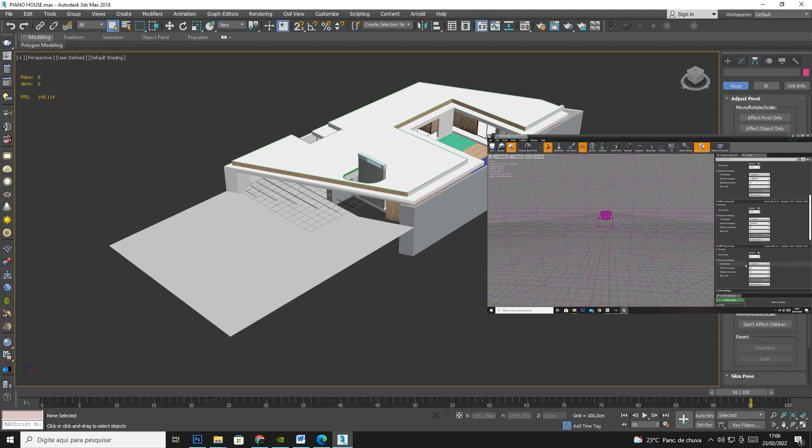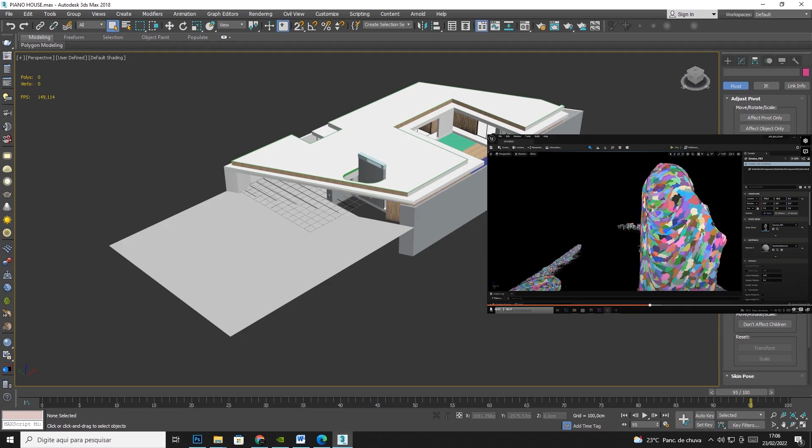We also have LOD on Unreal Engine 5. But in addition, when we get to the optimization module, there is also Nanite, a new technology that came specifically with the launch of Unreal Engine 5. This technology subdivides your object's geometry into clusters. Unlike LOD, this one allows you to use infinite polygon counts for your object. Obviously, there are some limitations, but we will talk about that in the Unreal Engine 5 class, okay? Don't worry about it, we'll talk about it.

But here in Max, it is already important that we think about how the objects will be optimized in Unreal Engine 5, okay? How do I want to present my project? Like a video, or browsing in real time? If I want to present it as a video, I can render this project. Rendering inside Unreal is much faster than another offline renderer. When rendering a video, I can abuse the polygon count a little more because I won't be browsing in real time.

Now, if the project is to browse in real time, it's necessary to optimize the geometries well and use the Nanite feature and also the LOD feature that is available in Unreal Engine 4 and Unreal Engine 5. What do I have to keep in mind when I'm talking about games and Unreal? Optimization and organization. Let's see, for example, how many millions of polygons our whole project has in the scene. How can I do it?

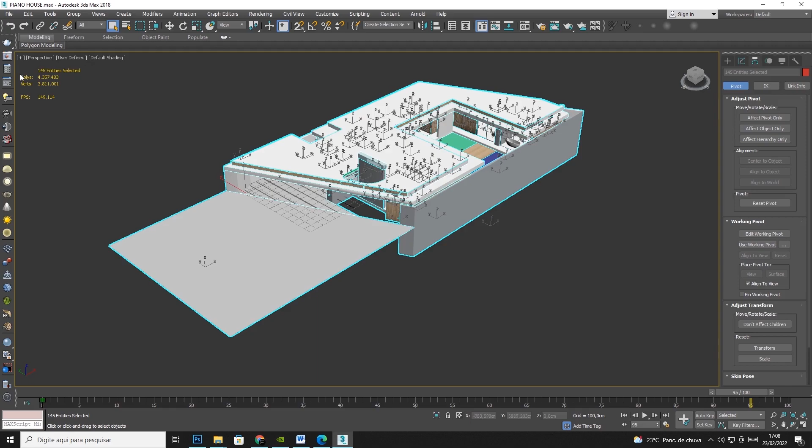In my case, you just select everything because I already enabled the stats in the scene. If your Max doesn't have the stats enabled, you can enable them by clicking here and right here, statistics, you're going to select this and activate this as well. Okay, great. Click right here, and then click right here. Cool. Once this is done, it will show you the statistics.

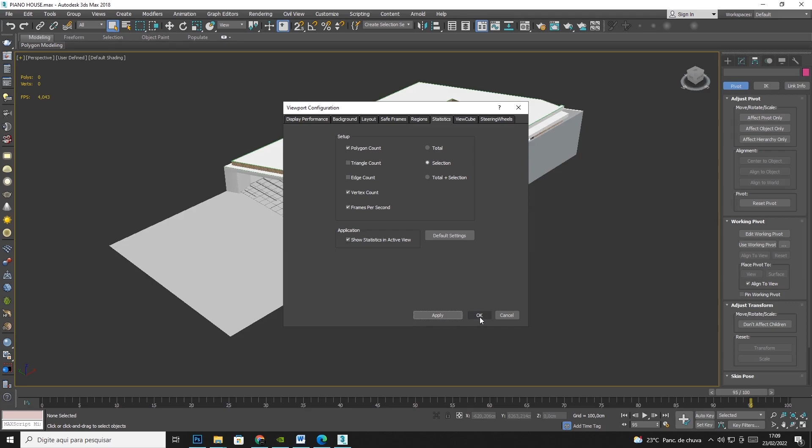So if I click here on the street, I have 2 polygons and 6 vertices. If I click on the ceiling, I have 63 polygons and 122 vertices. If I click on the couch, I have over 200,000 polygons. If I click on the armchair, I have almost 630,000 polygons. It's a lot of polygons to use inside Unreal. So I always have to think about optimizing my scene.

Currently, in 2022, the year this video is being recorded, Archmodels blocks, Maxtree blocks, SpeedTree blocks were not meant to run in real time. They were meant to be rendered in offline renderers, like Corona and V-Ray. So these blocks did not start from the premise of optimization, but from realism and a high level of detail. And here, working in real time is a great challenge. You need to reach equilibrium between optimization, a low polygon count, and an object as detailed as possible. And this is a big challenge.

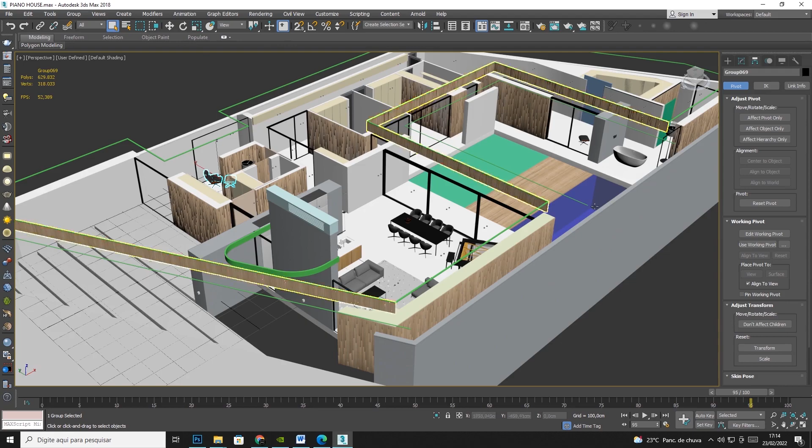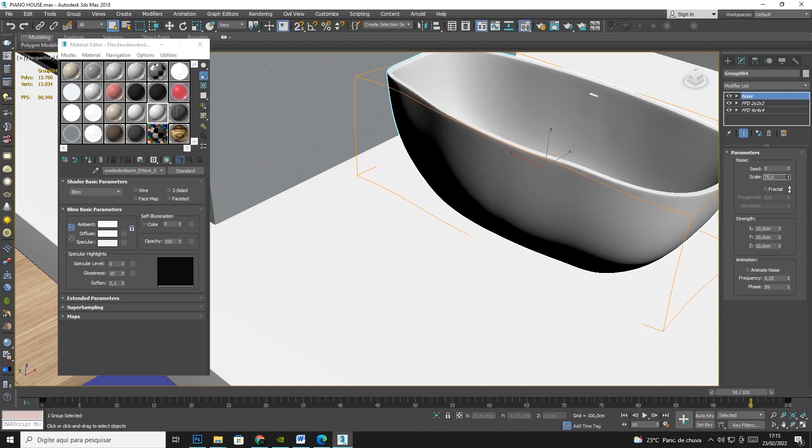Let's take this bathtub here, and let's think that this bathtub I'm doing in an animated way, and I'm going to add a modifier, which is the noise modifier. Let's change the strength here to 10 centimeters. Let's see. Look, you can see the mesh being deformed, right? And this deformation is done in geometry.

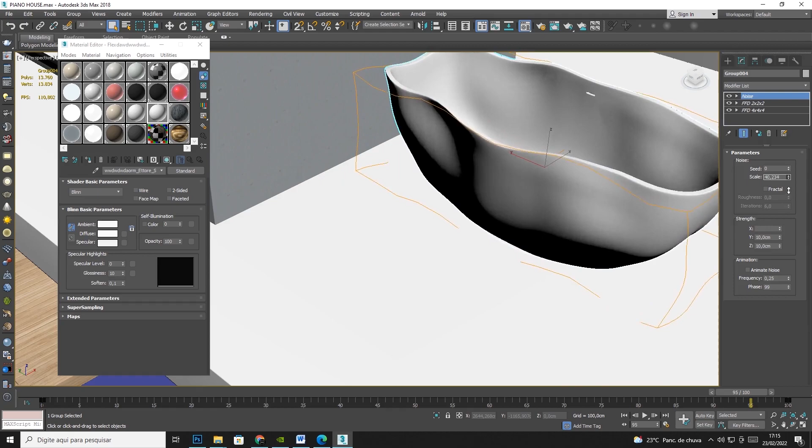When we use the Nanite technology, it is not possible to apply Nanite to objects that are deformed, okay? For example, if you have a real-time character that is walking in your project, that character cannot use Nanite for optimization because leg movement causes deformations in the geometry. And Nanite does not support these deformations of the geometry. So in this case, you would use LOD because LOD will support the deformation.

So let's think for this project here. We won't have any deformity in the geometry, okay? The bathtub will not be animated, and there will be no deformity. Cool? If your object is going to be animated and is going to move like this, and it doesn't have any deformity, there is no problem, okay? Nanite will work. The Lumen, which is the lighting system we use on Unreal, we'll talk about it later, don't worry about it. If your object has deformity, it won't be compatible with Nanite, okay? Then you will have to use LOD. We're gonna talk about it.

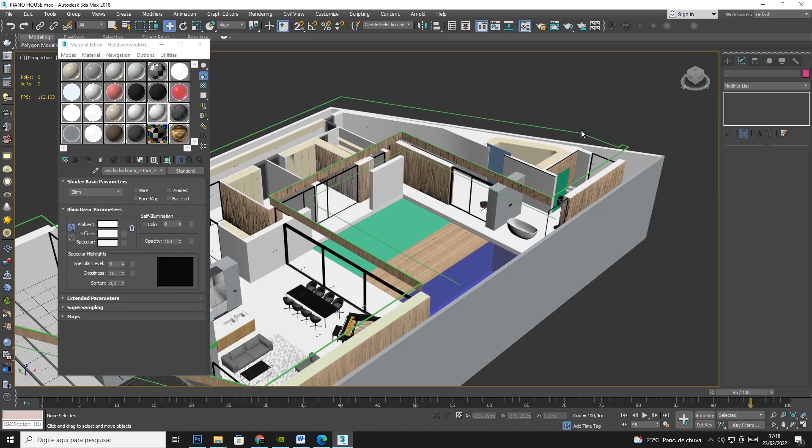Let's get back to the polygon count. Look at this. Starting from the idea that for this project I won't have mesh deformity animation, I'm basically going to use Nanite for almost everything. But don't worry about it, because I'll teach you how to use LOD on Unreal, okay? Meanwhile, let's just worry about Nanite. Nanite allows us in Unreal Engine 5 to use a basically unlimited amount of polygons.

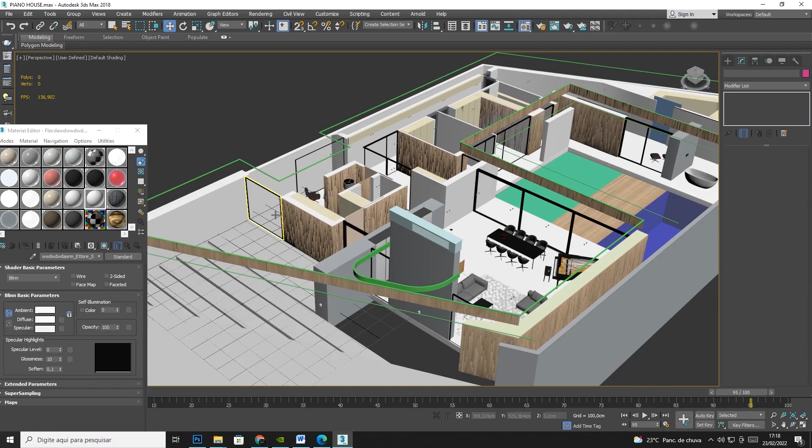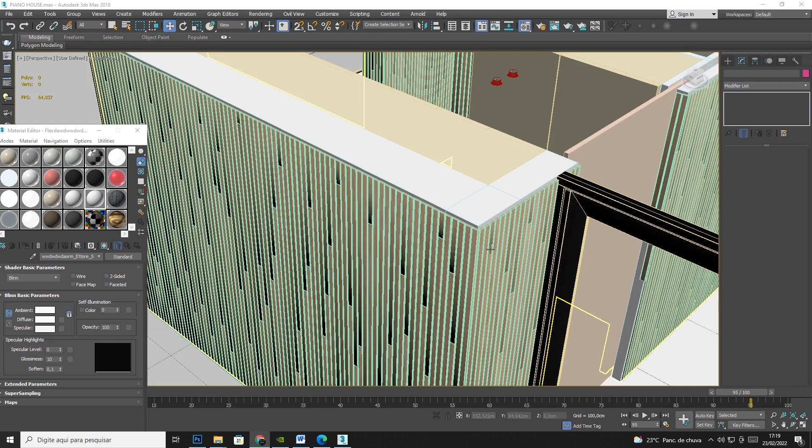Check it out. We can, for example, bevel the edges of these little pieces of wood here. In Unreal Engine 4, this was almost unthinkable because there are a lot of polygons. But since I'm thinking of turning this object into Nanite, I can overdo the polygon count.

So you ask me, okay Dennis, do I have a limit to stop counting polygons in my object? Basically no, but it's interesting that you don't spend more than 1 million. Because depending on your GPU, your graphics card, it's not cool to abuse the polygon count too much, okay? Go between 5,000, 500,000 and maximum 1 million. Because when importing this file to Unreal, when it saves or compiles the elements in its scene, it may close because there are too many polygons for the GPU to process.

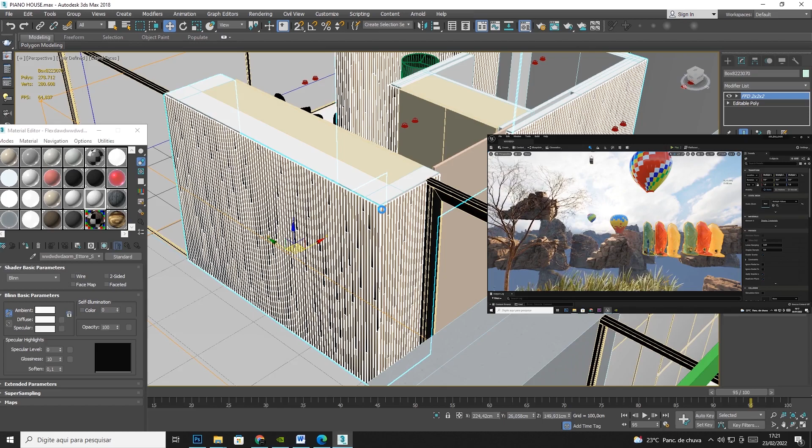But once that file went to Unreal and it's usable there, you can replicate it infinite times. So, for example, you can have a bed that has 500,000 polygons. You can take it to Unreal and replicate it 1 million times, okay? This amount of model duplication will have no impact on the frame rate. Frames per second is the name we give to how many frames your GPU can render each second, like in a game, that is the FPS, okay?

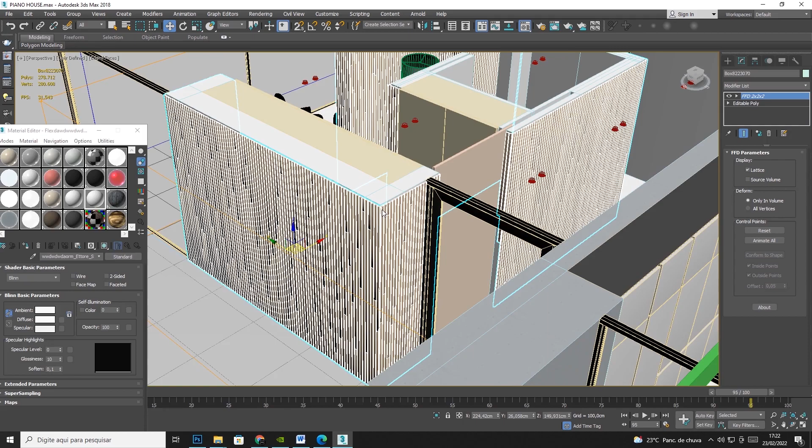There are several names, a lot of confusing things if you're seeing Unreal for the first time, but don't worry, okay? As the course goes by, you will get familiarized navigating and using the tool. Things will be much simpler than you think. So don't worry, because things will be pretty easy for you, okay?

So let's adapt this idea to your project. Will I have in my animation geometries that will deform? Will I have an animation inside this geometry? Will it move, distort? Will there be a deformity in the mesh? If the answer is yes, it's better to use LOD, okay? If the answer is no, if furniture will be animated just by positioning and I won't have mesh deformity, I can use Nanite, cool?

So if we are going to use Nanite, I can have more polygons in my object. I can go from 0 to 1 million, depending on your GPU, per object. It's not the whole scene, it's just for the object. So for example, the armchair over there has like 600,000, okay? That's a high amount, but it's a super detailed model. Look at this. We can see that the armchair here has a lot of lines, many polygons, okay?

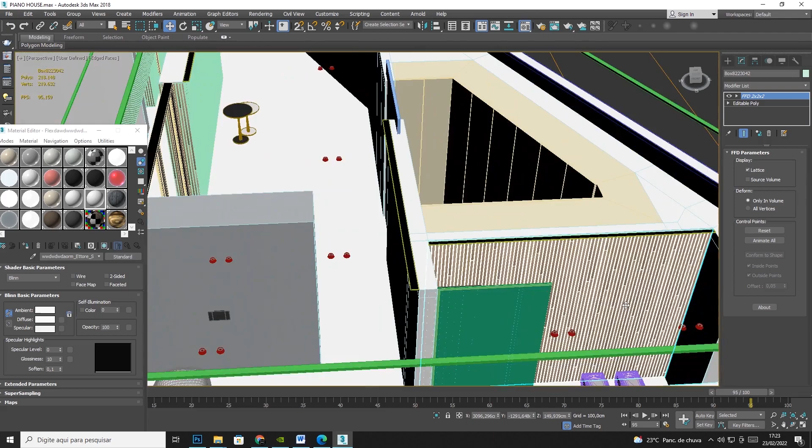So I can have this object that has 600, the chair that has 30, sofa 200, this one 16, the bathroom 200, the other 280, this one 350,000, okay? As I won't have geometry animation, it is just object positioning, just the object moving, so I can use Nanite. So I can start from the idea that I can go from 0 to a maximum of 1 million polygons per object. Otherwise, I will use LOD.

This class is a little bit more informative about optimization, but don't worry about it. We'll see how to do optimization in practice.